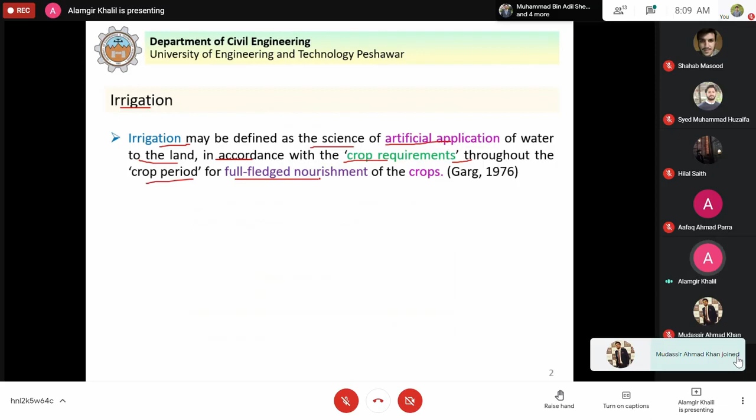Now, what is irrigation? Irrigation may be defined as the science of artificial application of water to the land in accordance with the crop requirements throughout the crop period for full-fledged nourishment of the crops. So what is irrigation? It is the science of artificial application of water to the land.

As I said before, the natural way to supply water to the crops is rainfall. If we have rainfall that can supply the correct amount of water to the crops at the required times, then there should not be any need of artificial application of water. But rainfall is a random variable, meaning sometimes we have more rainfall, sometimes less, and rainfall cannot ensure the required quantity of water to the crops, not just at one place, but at all the places where we grow crops. So since it is very difficult, we have to artificially supply the water to the crops.

Because agriculture provides food to the population, this is important for survival. That is why we have irrigation: the science of artificial application of water to the land in accordance with the crop requirements. How much water the crop requires, according to that we have to supply the water throughout the crop period, from the time of sowing to the time of harvesting. So throughout the crop period, the amount of water required by the crop for full-fledged nourishment is known as irrigation. We artificially supply water to the crops during the crop period according to the crop requirements. This is irrigation.

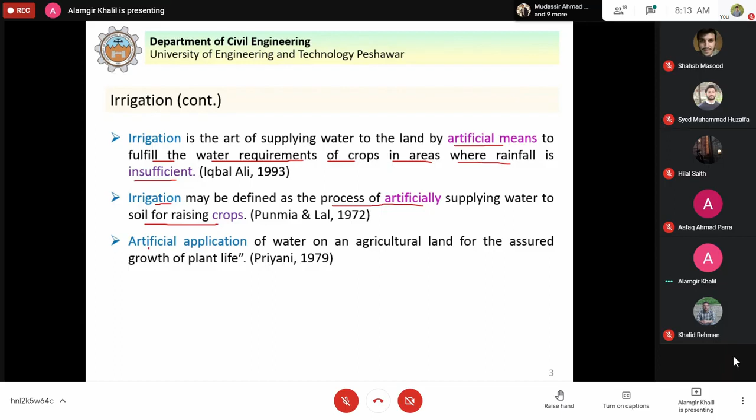Similarly, irrigation may be defined as the process of artificially supplying water to soil for raising crops, or artificial application of water on an agricultural land for the assured growth of plant life. So from all these definitions, we can conclude that it is the artificial application of water to the crops for their full-fledged nourishment. This is known as irrigation.

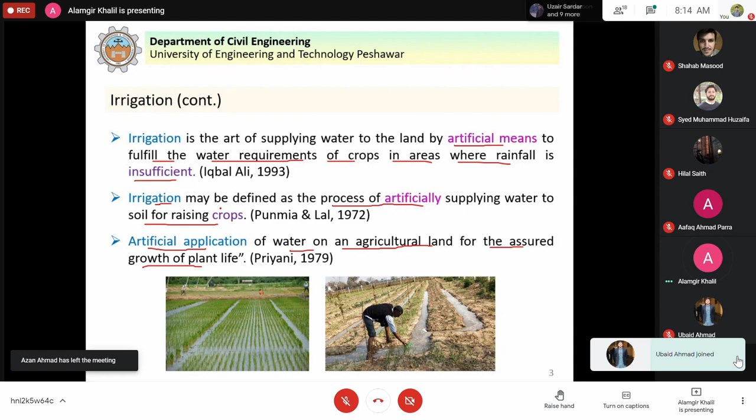Now, what is irrigation engineering? The science of planning and designing a water supply system to the plants and crops for their normal growth during the period of no rainfall, with the help of dam, weir, barrage, reservoir and canal system with headworks, cross drainage works, and miscellaneous works of canal like canal falls, is called irrigation engineering.

So what is irrigation engineering? It is the science of planning and designing a water supply system. Now we learn that irrigation is the artificial application of water to the crops. So how do we provide this water to the crops? For this we have to plan and design a water supply system.

That will include construction of a dam, weir or barrage, or we directly divert the water from a river through a canal system, or the canals can be provided from the dams with headworks where we can control the flow, and the network of canals if they cross natural streams or drains.

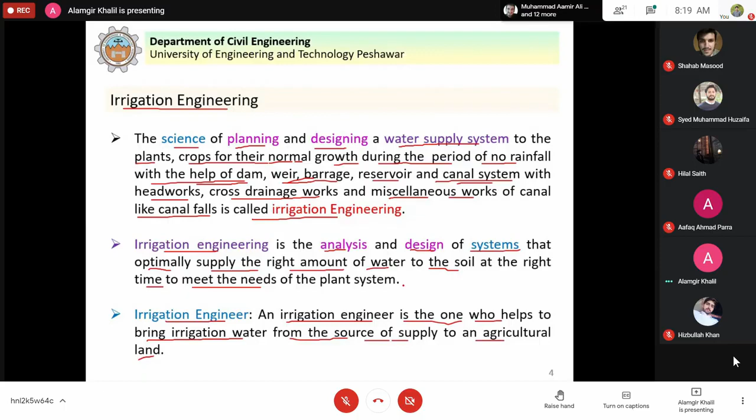Now, is irrigation a new science or art that we supply water to the agricultural land? Irrigation system is as old as human civilization. In fact, civilization would probably not be possible without some form of irrigation. The earliest form of irrigation probably involved people carrying buckets of water from wells or rivers to pour on their crops.

Irrigation means that we artificially supply water to the crops, but the same crops provide food, which is important for the survival of human beings. So we are growing crops since the beginning of human civilization, because food is important for survival, like water, so it means that we have to supply water to the crops.

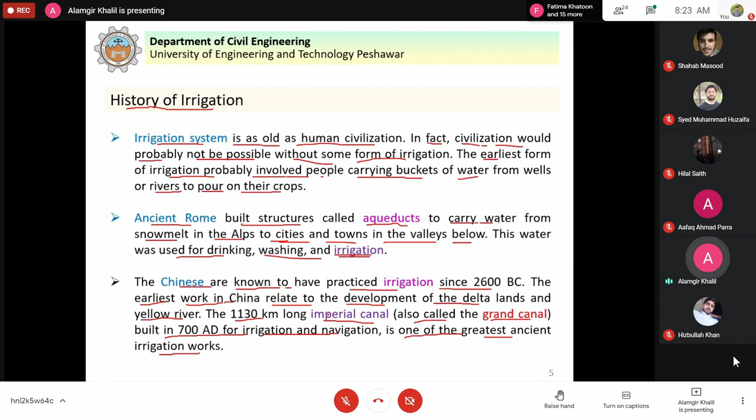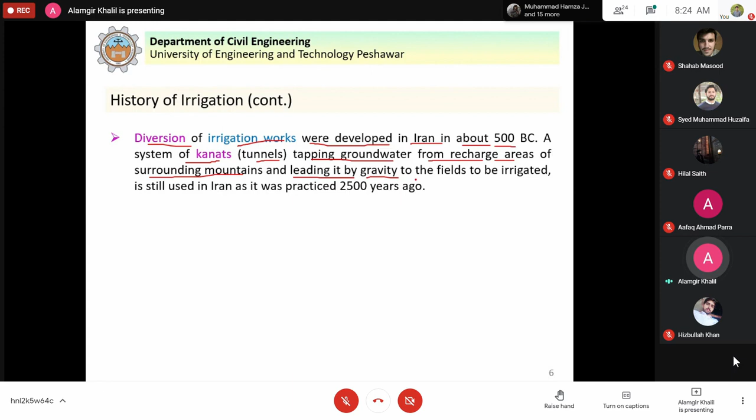Diversion irrigation works were developed in Iran around 500 BC. A system of kanats, tunnels, tapping groundwater from recharge areas of surrounding mountains and leading it by gravity to the fields to be irrigated, is still used in Iran as it was practiced 2500 years ago. You can see here that these kanats, which are very famous even today, show how at that time people, through these tunnels, took the water to the fields to be irrigated.

Diversion of streams by canals for irrigation was practiced in Japan before 600 BC. You can see here that in Japan, canals diverted water from streams for irrigation. Irrigation by diversion works and direct flooding by rivers is known to have been extensively practiced in Thailand, Philippines, and Indonesia. The ruins of Mohenjo-daro and Harappa, the Indus Valley civilizations, have also shown proof of use of water supply and irrigation.

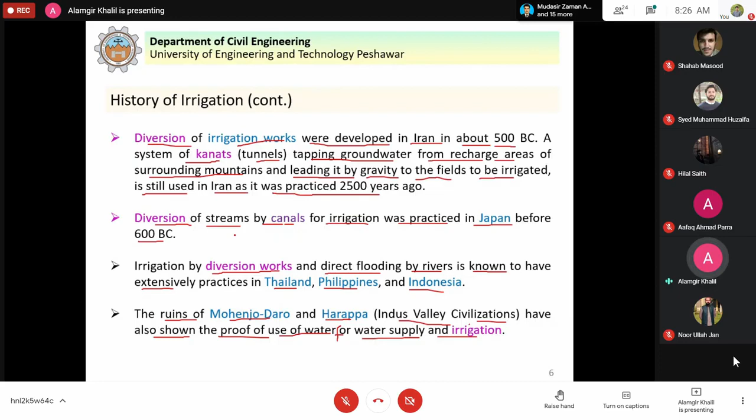Now, irrigation engineering consists of 4 phases. Number 1 is storage or diversion. The first step in irrigation engineering is that we have to store the water by construction of a dam, or we have to divert the water from a river by construction of a barrage. So this is the first phase.

The second phase includes conveyance of irrigation water. How will we convey this irrigation water?

We have to construct canals for this purpose that will carry the water from the dam or from the river directly.

The third phase includes distribution and application of irrigation water. By distribution, we mean that we have to distribute this water between the different agricultural lands, between the different farmers that own that land. So how we distribute that water, and then how the water is applied to the crops, for this we have different methods of irrigation. Once the water reaches the farm, how it is applied to the crops.

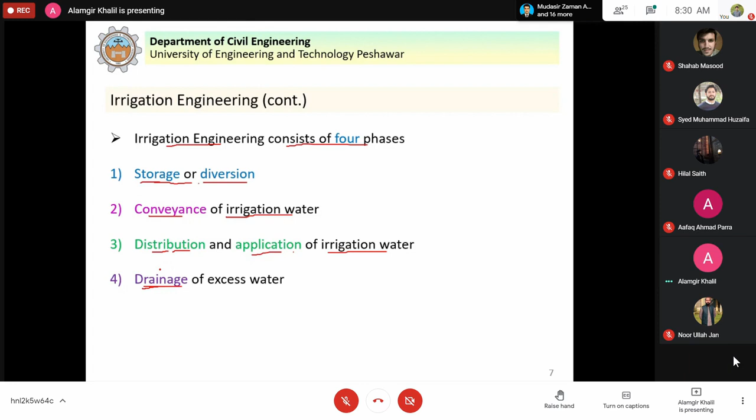Next, we discuss the necessity of irrigation. The first important factor is less rainfall, because the rainfall over an area is not sufficient to grow the crops. That necessitates artificial supply of water to the crops. As I said before, if we have sufficient rainfall, then there is no need of artificial application of water. But as we saw in the first lecture, the rainfall is variable from place to place. Just like you saw that in Sindh and Balochistan, those areas receive less rainfall during a year that is not sufficient to grow the crops. That's why those areas are classified as semi-arid to arid land.

So the reason why we have irrigation is because of less rainfall. The second factor is non-uniformity of rainfall. If we have uniform rainfall over an area, in that case it can supply water to the crops. But since rainfall is highly variable, this is also one factor that necessitates artificial supply of water, because the rainfall from area to area is not uniform. So, non-uniformity of rainfall.

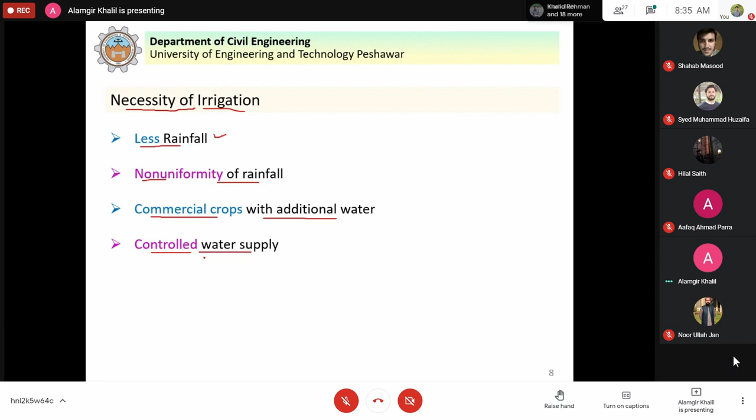In irrigation, we can have controlled water supply. You can see that over rainfall we have no control. Rainfall is a natural process and it occurs depending on the natural conditions of that area. But when we artificially supply water to the crops, we have control over the water supply. For example, from the dam, you can stop the supply of water in the canals. Or if we have diversion of water from a river, we can stop the water, or we can control the quantity of water that is flowing. So this is the advantage that we have controlled water supply.

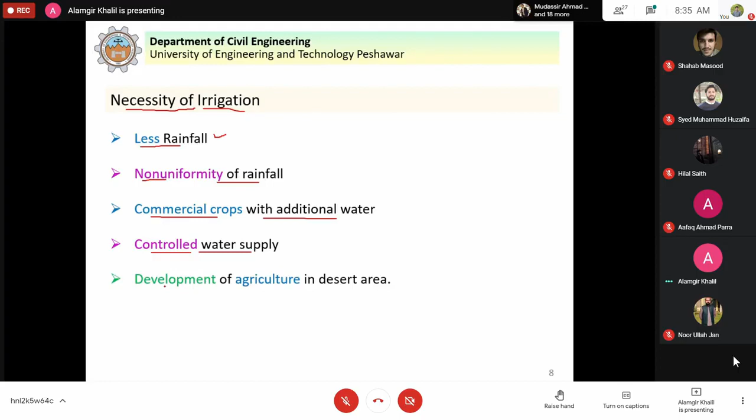Development of agriculture in desert areas: you can see that in deserts we can bring the land under cultivation if we can construct canals that can supply the water from dams or from rivers to that area. So it can be brought under agriculture, we can grow crops. This is possible through irrigation. So these are the different factors that necessitate irrigation and irrigation engineering.

Now, advantages of irrigation: increase in food production. Because of irrigation, more area is brought under cultivation. We are able to grow more food to feed the population, and also agriculture is the backbone of our economy. It provides jobs for millions of people. So the first factor is increase in food production. Because of irrigation, we artificially supply water to the crops at the required times and required quantity, so we are able to increase food production.

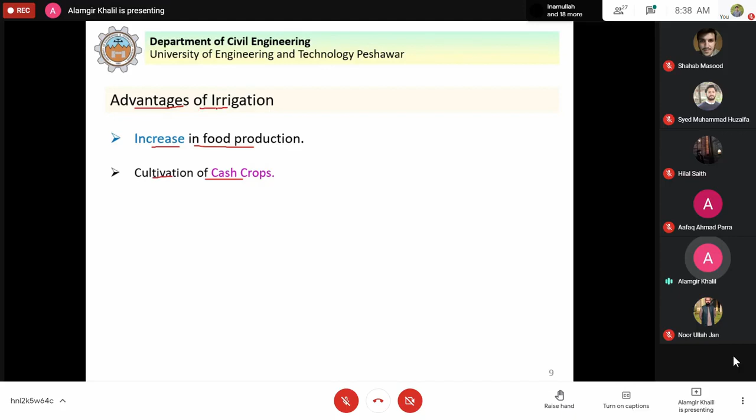Cultivation of cash crops. Cash crops mean crops that can provide cash, money, just like cotton as I said. Cash crop can also be tobacco, although it is not encouraged anymore. These are examples of cash crops that can lend the farmer cash. So this is an advantage of irrigation, cultivation of cash crops.

Generation of hydroelectric power. Because we construct the dam to store the water that can be supplied for irrigation, but we are also able to generate electricity. Similarly, hydroelectric power can be generated. You see the Ghazi Barotha hydropower project. It is just a canal which carries water from Ghazi to Barotha, but there a head is available, and we have installed 5 Francis turbines generating electricity. So because of irrigation, we get the opportunity to generate hydroelectric power.

Domestic and industrial water supply. The network of canals which supply water to the crops, the same canals can be used to supply water for domestic and industrial purposes also, because the crops do not require water 24 hours every day. So we supply water to the crops when they require it, and during the remaining period the same canals can supply water for domestic and industrial purposes to the adjoining areas.

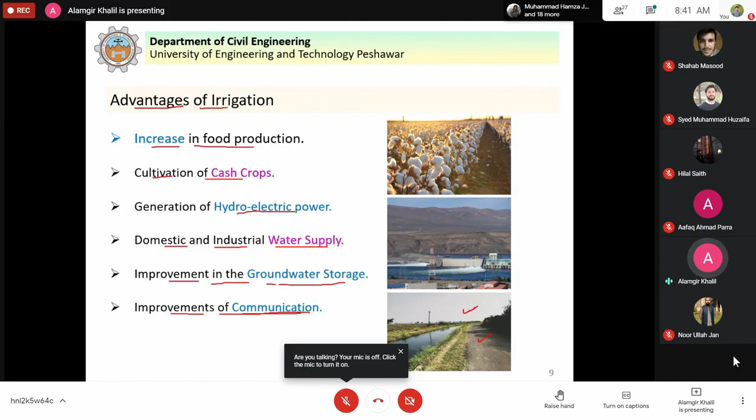Improvements of communication. You can see here that when we construct canals, along the sides of the canal we also build roads. So because of irrigation, we have improvements of communication. So these are the advantages of irrigation.

Now some disadvantages. Raising of the water table, that is water logging. Because of irrigation, we supply water artificially, so on the other side you see that the dams we construct, seepage takes place, and the water table in the adjoining areas can raise, and if the water rises to the root zone, then plants will not be able to grow. So the productivity of the land is adversely affected.

Because of irrigation, you see that if the area is flooded and the water is not drained, this can also happen. That is why drainage is important and is a prerequisite of irrigation engineering, that we have to drain the excess water from that land. So if in an area the water table intersects the ground surface, the water will be there in the root zone all the time. That is not beneficial, we cannot grow crops. That is known as water logging. Because of irrigation, this is the disadvantage, that the water table can rise to the root zone or the surface of the ground, and the land can become not productive for agriculture. So this is a disadvantage of irrigation.

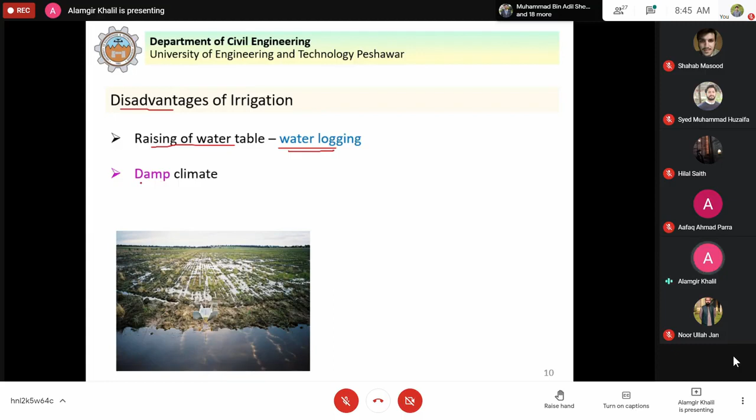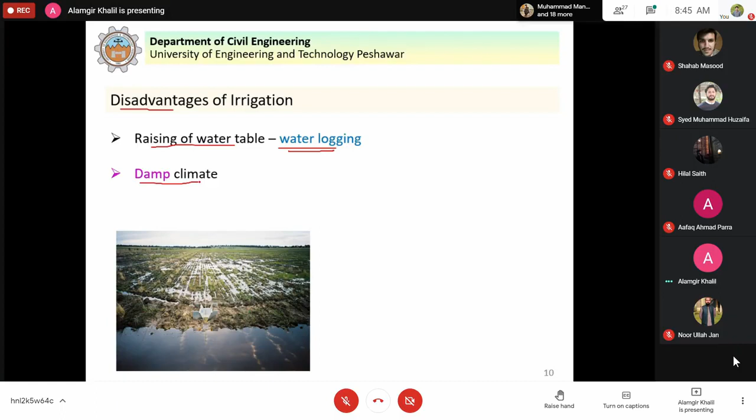The second thing is we have a damp climate, which is undesirable, because it can become a breeding place for mosquitoes, and it will result in spreading of diseases in that area. So the disadvantages are that we artificially supply water to the crops. We should ensure that we supply the quantity of water that is needed by the crops during the crop period. Excess than that, then there will be negative impacts.

Now, other problems that are associated: competition for surface water rights. It means that the water which is used for irrigation may not be used for other purposes such as domestic and industrial water supply. So there could be competition. It means we cannot supply water for agriculture unlimited, there are other competitions. We have to supply water that is available in an area for drinking purposes, for domestic water supply, for industrial purposes, and for agriculture purposes. So it means that the water which is supplied to the crops will not then be available for domestic or industrial water supply. So it means competition for surface water rights.

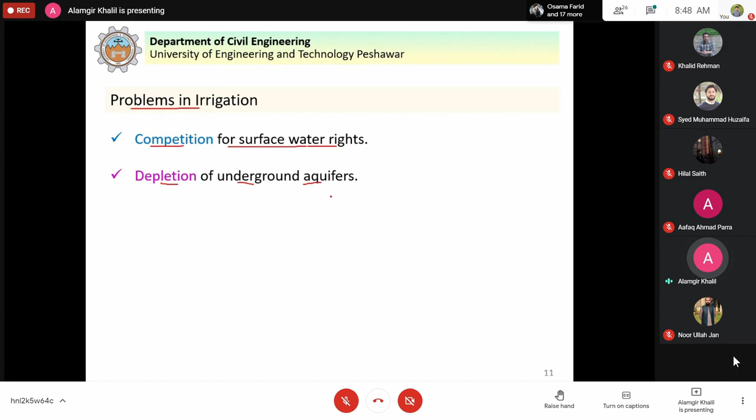So it means that when we pump the groundwater, it should be such that it does not cause negative impact on the groundwater storages. The groundwater that is recharged by rainfall or other sources that we studied in the first lecture, that is seepage from the rivers or from the canal network, and then we are extracting that groundwater. So if the extraction is more than the recharge of the groundwater storages, then definitely it will result in depletion of these underground storages.

And this is an important source of water for domestic, industrial, and agriculture purposes. You can see here in Peshawar we are using the groundwater for different purposes. So if the groundwater storages finish, then you can imagine. So the problem with irrigation is that extensively we are supplying the water to agriculture, that causes depletion of underground aquifers.

Build-up of toxic salts on soil surface in areas of high evaporation. In an area when we supply the water, the water dissolves the different salts that are present on the surface of the earth. So in areas where there is high evaporation rate, the water quickly evaporates and leaves behind these salts.

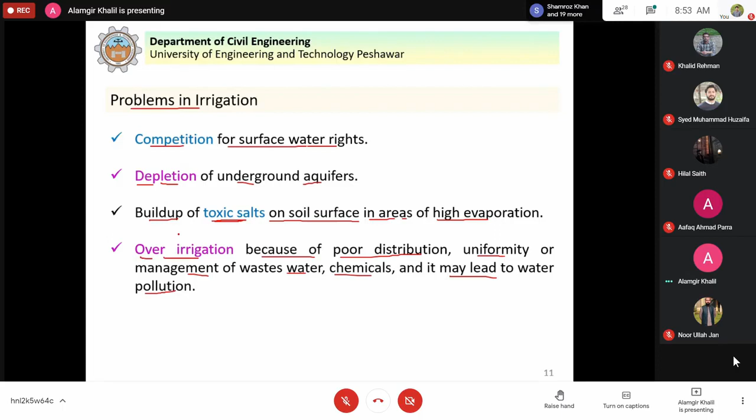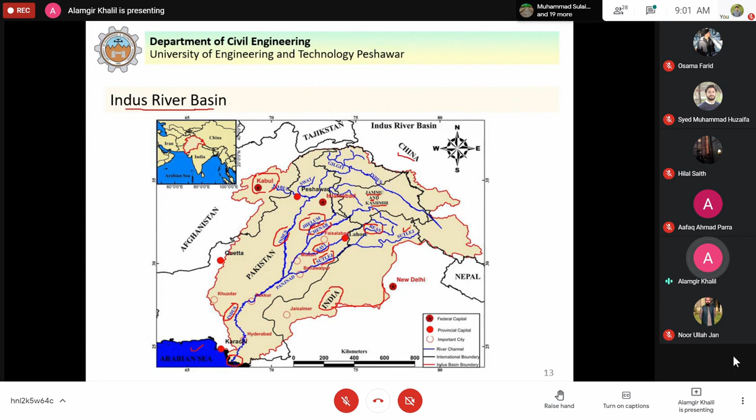Indus, Jhelum and Chenab. If I go back here, you see this Indus, so this is originated here. This is Jammu and Kashmir. It's not that these are not originating in India. Similarly, you can see here the Jhelum and the Chenab here. You see the Chenab here. So these are also coming from India.

But under the Indus Water Treaty, Pakistan has full control over the use of water of the 3 western rivers, whereas India has control over the use of water of the 3 eastern rivers, that include the Ravi River, Beas and Sutlej. So on the Indian side, you see this red line shows the partition. They have constructed hydraulic structures.

You can see here on the Pakistan side, we have this Tarbela Dam, Kalabagh Barrage, Mangla Dam on the Jhelum River, Marala Barrage, Kadirabad Barrage on Chenab, then Rasool Barrage on Jhelum River. You can see here Chashma Barrage, Taunsa Barrage on the Indus River, then Trimmu Barrage here, Sidnai Barrage, Baloki Barrage here on River Ravi. Then we have Sulemanki Barrage here, this one, Islam Barrage, on the Sutlej, then Panjnad Barrage and Gaddu Barrage here. So these are the different hydraulic structures that exist in the Indus Basin Irrigation System.

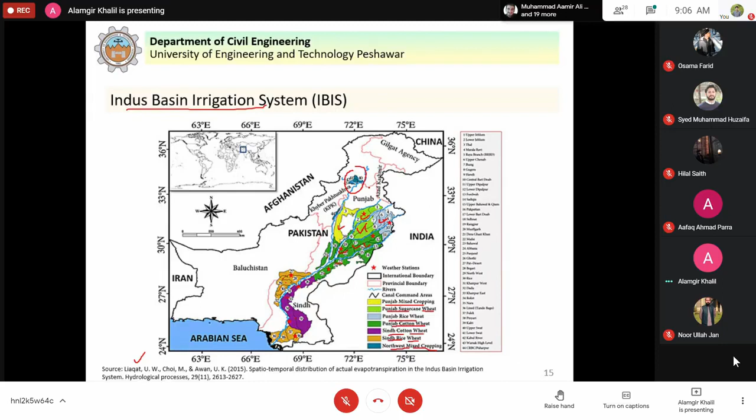Now, land use in Pakistan. So the total geographical area is 196 million acres. In Pakistan, area suitable for agriculture is 77.1 million acres. The cultivated area, that is irrigated plus the rain-fed Barani, is 54.5 million acres. Now area under irrigation by all sources is 44.5 million acres.

Additional area that can be brought under irrigated agriculture is 22.6 million acres. In this figure, the area under irrigation is shown by this shaded blue or green color. This white-blue combination is area that can potentially be brought under irrigation, showing the potential for more lands to be developed for agriculture. This shaded area here represents deserts. So there exists great potential for areas that can be cultivated, resulting in food production. Pakistan can become self-sufficient in food and also export and earn foreign exchange.

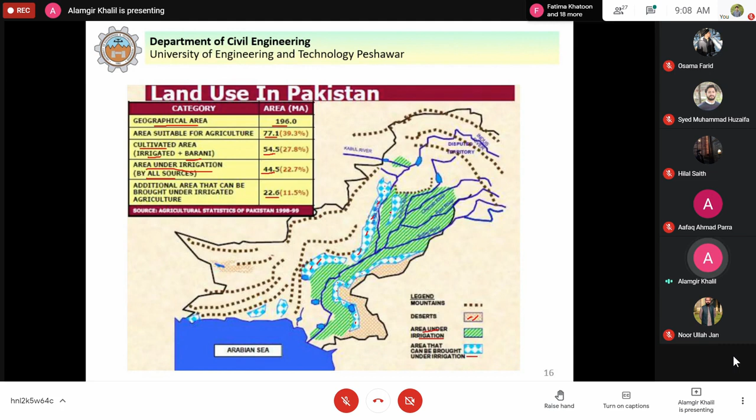Now this Indus Basin irrigation system is Pakistan's largest contiguous gravity flow irrigation system that serves the Indus River and its tributaries, namely the Jhelum, Chenab, Ravi, and Sutlej rivers. It is the largest continuous gravity flow irrigation system serving the Indus River and its tributaries, and the largest continuous surface water irrigation system in the world, starting from the north to the south of the country.

It consists of 3 major storage reservoirs, 19 barrages, 2 headworks, 2 siphons across major rivers, and 12 link canals. As I said in the first lecture, a link canal links 2 rivers together. When you want to divert water from one river to another, that is done by these canals, known as link canals.

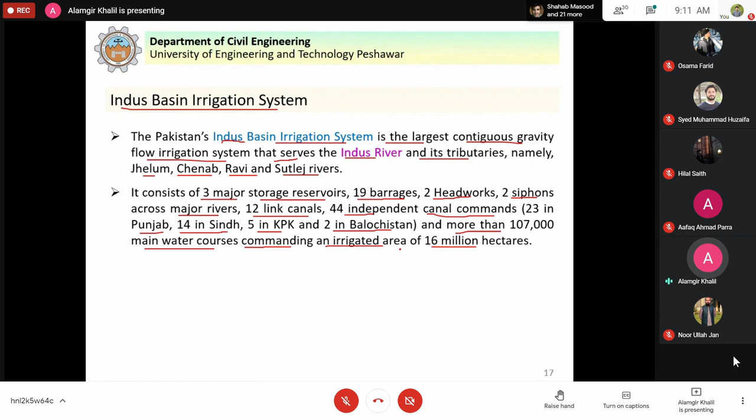The aggregate length of canals is about 56,073 kilometers. This is the total aggregate length - if you add up the length of canals provided in the Indus Basin irrigation system, that is 56,073 kilometers. In addition, the water courses, farm channels, and field ditches are estimated to cover a length of about 1.6 million kilometers. So we have the main canals and then the water courses, farm channels, field ditches, narrow channels that supply water, covering a length of about 1.6 million kilometers.

The irrigation system of Pakistan further utilizes over 41.6 million acre feet of groundwater pumped through more than 700,000 public and private tube wells. So in addition to the surface water we utilize from the Indus River and its tributaries, in Pakistan we are also utilizing more than 41.6 million acre feet of groundwater pumped through more than 700,000 public and private tube wells, for agriculture purposes. This is in the context of the irrigation system, remember.

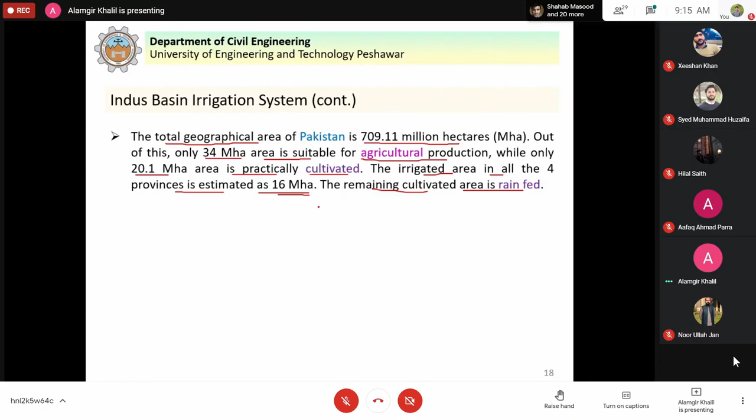The Indus Basin river system is the prime source of water for Pakistan's agriculture, which provides an income source to about 75% of the country's population and contributes about 25% to the GDP, gross domestic product of the country. That 25% of GDP is contributed by this Indus Basin river system.

It engages about 45% of the country's labor force and provides a sound base for the economy in terms of export and foreign exchange earnings. All these figures provided here and in the previous slide are from this source: Applied Irrigation Engineering, a book published by the University of Agriculture, Faisalabad, in 2017.

Now, water budget of the Indus Basin irrigation system, this is taken from internet. You see that mean annual river flows, that is between 140 to 150 million acre feet. Mean annual canal diversions, 103 million acre feet. Canal supplies at water courses, 77 million acre feet.

And canal supplies at the farm gate that is available to the farmer, 54 million acre feet. Because we already discussed the seepage losses, the evaporation losses, and the groundwater contribution around 50 million acre feet. So the irrigation water at the farm gate, that is 104 million acre feet.

So you can see that agriculture GDP, that is $50 billion, $500 million per million acre feet.

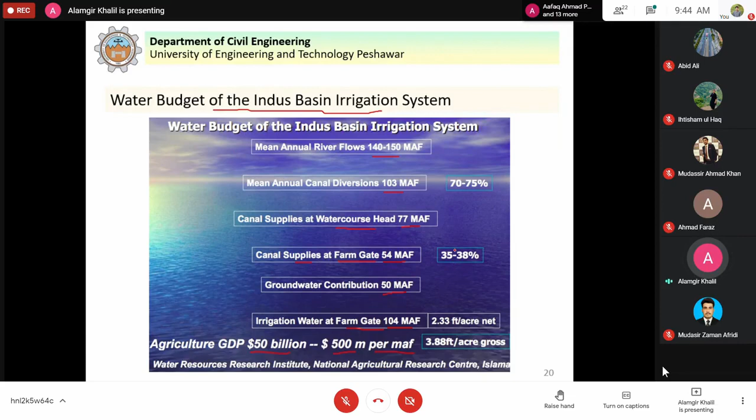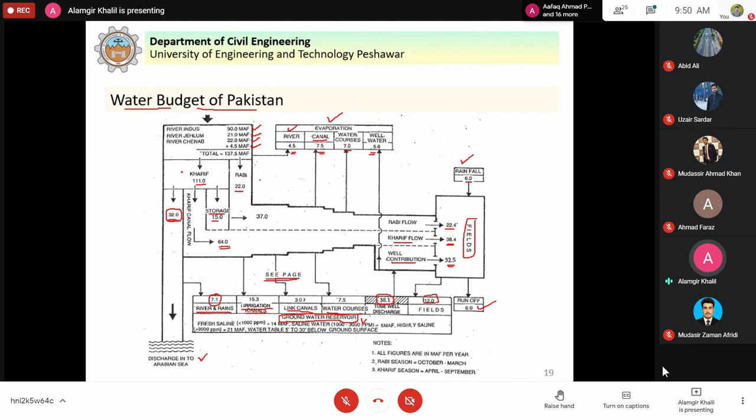Inadequate storage capacity. You can see, for example, 32 million acre feet of water is wasted to the Arabian Sea. If we have more storages available, we can store this water and then use it effectively to meet the water demands. So we have inadequate storage capacity.

Outdated and wasteful irrigation practices. This means that when we supply water to the crops, we are using outdated methods because that results in waste of water. In Pakistan we are using very conventional methods of irrigation - we just flood the irrigated area with water. Not all of that water is used by the crops at one time, so consequently the water is wasted. If we can use some latest methods, which we will discuss in today's lecture, it can result in saving more water and we can use that water more productively.

Unregulated groundwater pumping. We talk about the depletion of groundwater. The reason is that in Pakistan it is unregulated. The groundwater is extracted to meet the demands, and in Punjab it is used for irrigation purposes. So it should be regulated because this is an important source of water, and if the groundwater storages are depleted, then this source of water will no longer be available for use.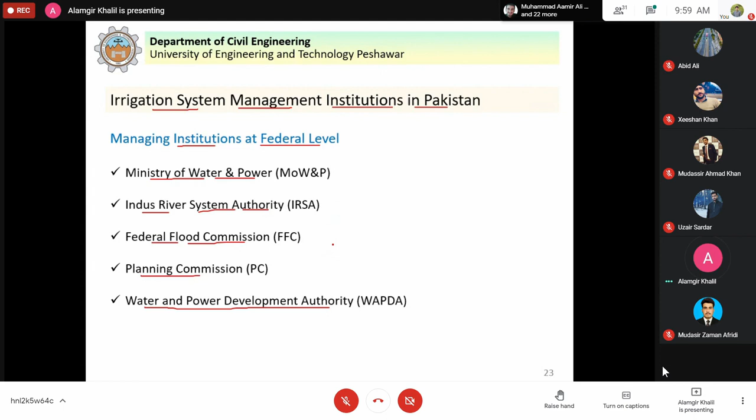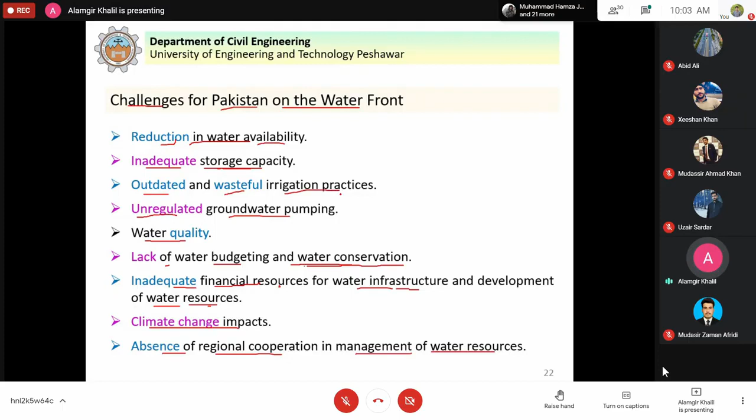Now we discuss types of irrigation. Irrigation can be divided into surface irrigation, and it can be subsurface irrigation. In the surface irrigation, the water is supplied over the surface of the ground, and then it is taken up by the roots of the crops for growth. In the subsurface irrigation, below the surface of the earth, through a network of pipes, the water is supplied to the root zone and it is taken up by the plants for growth. So we have surface irrigation and subsurface irrigation.

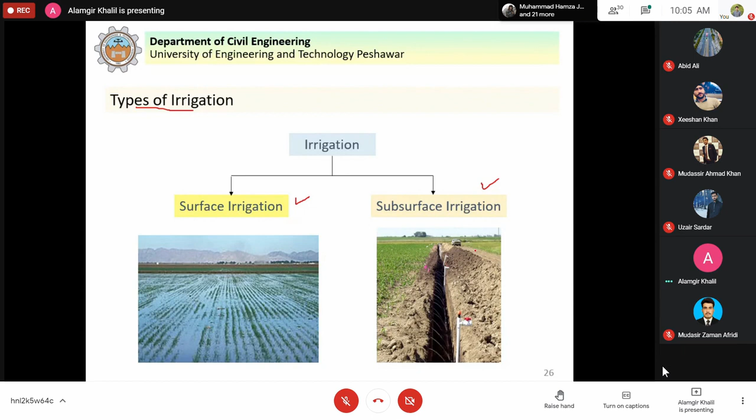Now surface irrigation can be flow irrigation, due to gravity, or lift irrigation, where water is lifted by mechanical means such as wells and tube wells. So that is lift irrigation.

Now flow irrigation can be perennial irrigation or flood irrigation, also known as inundation. What is the difference between the two? In perennial irrigation, like we say perennial river, it means throughout the year water flows in that river. When we say perennial irrigation, it means throughout the crop period there will be continuous and sufficient quantity of water available for the crops. There will be no shortage - continuous and adequate water is available throughout the crop period.

Perennial irrigation - we also have flood irrigation. Just like in a river, water is available only during floods. When floods come, water is available; when there are no floods, the rivers are dry. Similarly, in flood irrigation, the area is flooded and then soil moisture in the ground supplies water to the root zone, used by the crops. In addition, rainwater supplements this water for the growth of crops. So this is inundation or flood irrigation.

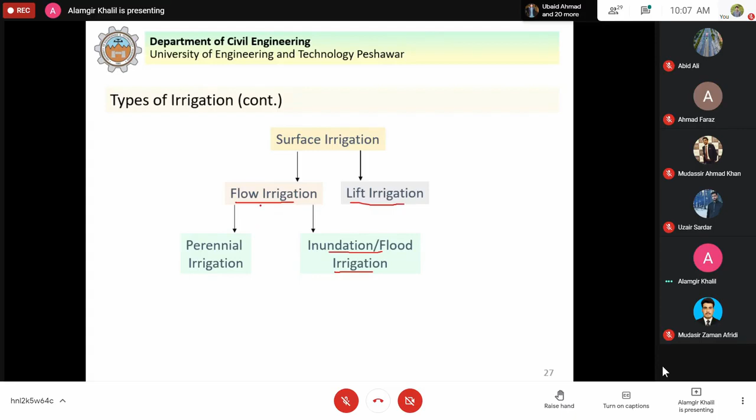In flow irrigation, water flows due to gravity. In lift irrigation, we have to lift the water - for example, through wells and tube wells, via pumping. Then the water is supplied through canals to the agriculture fields. This flow irrigation can be direct irrigation, that is river canal irrigation, where we simply divert water from the river through canals. Or it can be storage irrigation, where we construct a reservoir or storage scheme and supply water from there. Or it can be a combination of storage and diversion.

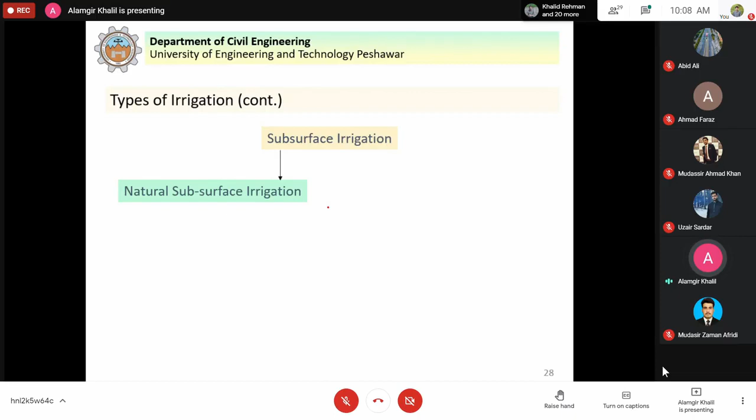Now, subsurface irrigation can be natural subsurface irrigation - leakage water from channels goes underground and may irrigate crops sown on lower lands by capillarity. Although it cannot be on a large scale, sometimes the water leakage from channels carrying water goes underground and may irrigate crops sown on lower lands by capillarity. This would be called natural subsurface irrigation.

We also have artificial subsurface irrigation, when a system of open jointed drains is artificially laid below the soil to supply water to the crops by capillarity. In this case, a network of pipes is provided that directly supplies water to the root zone of the crops. That is artificial subsurface irrigation. An example is Karez in Balochistan, which has been practiced for a long time.

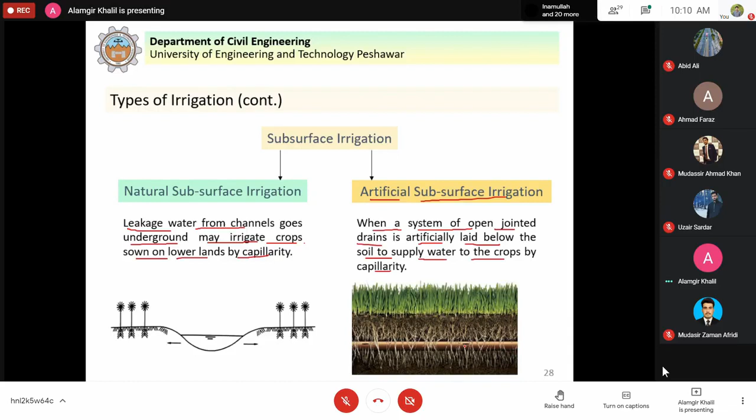You can see here that in subsurface irrigation, we have a network of pipes running underground that supply water to the root zone. Of course, it is expensive to provide such an arrangement in an area. Another challenge is how to maintain such a system - if there is any blockage, how do we know? So maintenance could be an issue.

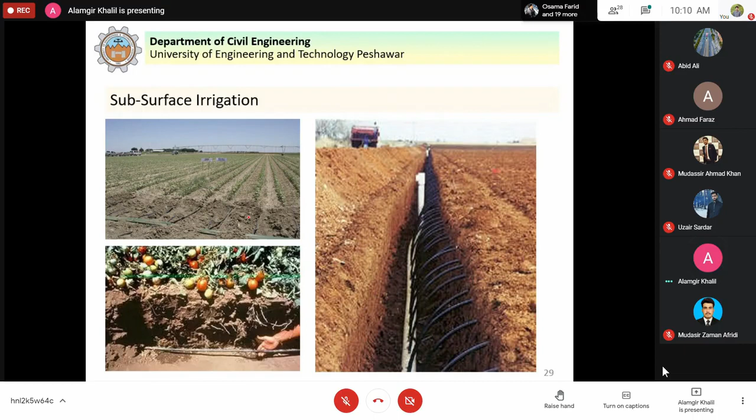Next, we discuss methods of irrigation water distribution in the farms - when water reaches the farms, how it is distributed through different methods. Irrigation water may be applied to the crops by various methods: free flooding, border flooding, check flooding - these are different methods. Also basin flooding, furrow irrigation method, sprinkler irrigation method, and drip irrigation method. These are the different methods by which water is supplied to the crops.

Let us briefly discuss each of these. The choice of irrigation method - how do we select it? The following criteria should be considered. Water supply available - some methods are very water intensive and supply more water, while others supply less. This is one factor that determines the choice: how much water is available. If water availability is scarce, we cannot use flooding methods; we use other methods that save water and only provide the required quantity to the crops.

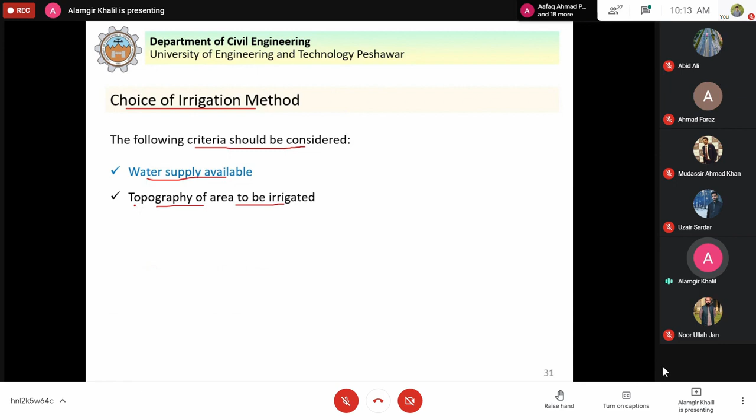Topography of the area to be irrigated - based on topography, we determine which method is suitable to effectively supply water to the crops. Also the climate of the area, what crops we have to grow, and how to supply water effectively. The soils of that area are also an important factor. Crops to be grown - what type of crops are we growing? Do these crops require less water or more water? This will also impact the selection of the particular method.

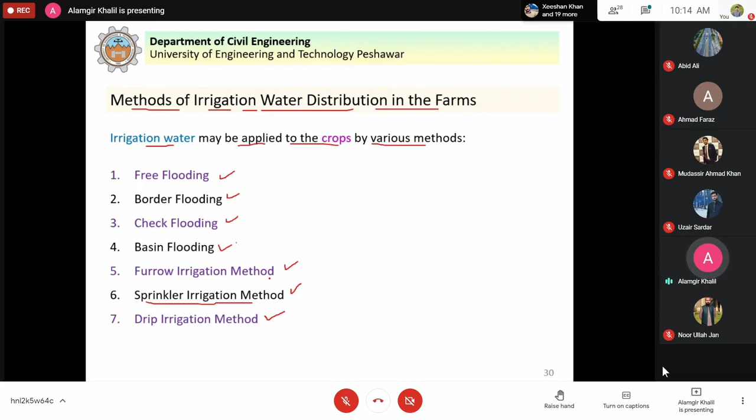Economics: is the method we use to supply water to crops cost effective? For example, if we are using the latest methods, what will be the cost of installation and the output we get in the form of crops? So the economics affects the selection of method, along with local traditions and skills. For example, with sprinkler irrigation, do the farmers have the skills to use this technique of water application to the crops? These are the different factors that affect the choice of irrigation method.

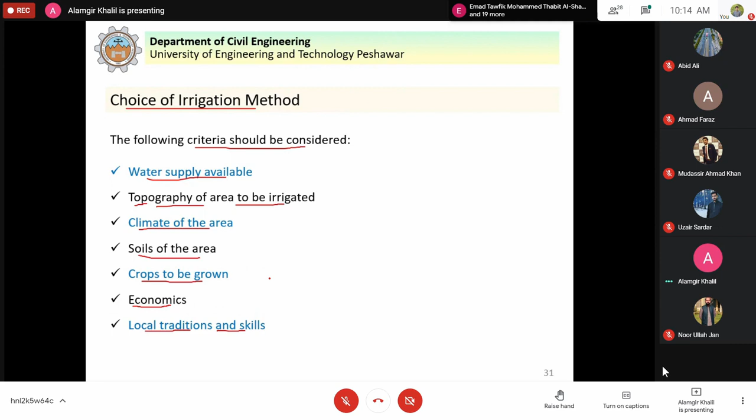Now we discuss free flooding. We have the main supply ditch, a narrow channel that supplies water to the farmers, then subsidiary ditches, and the area is flooded with this water. Here we are not controlling the water, that's why it is called free flooding. These are examples of free flooding.

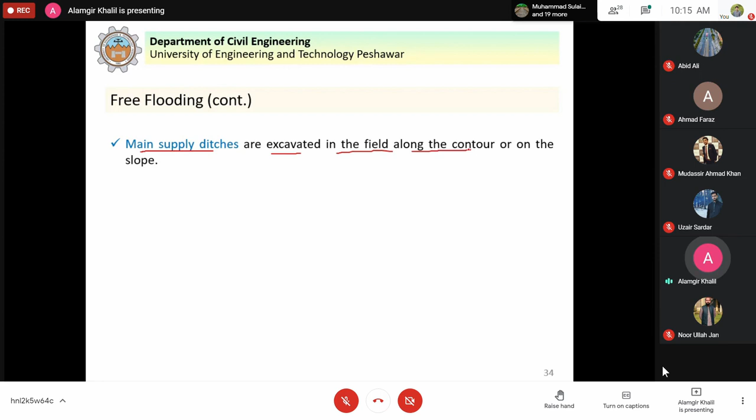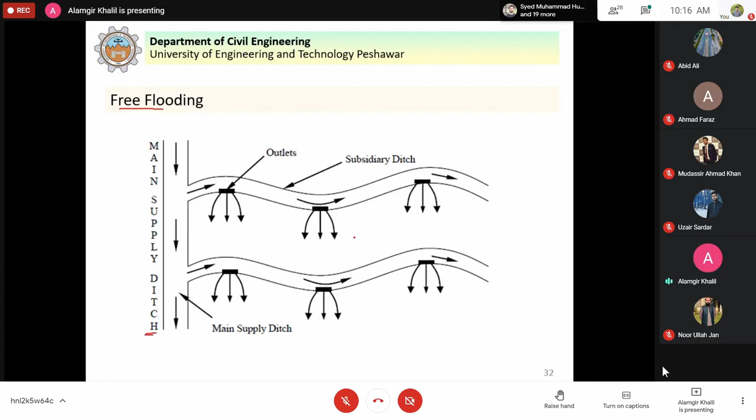In this method, we have main supply ditches excavated in the field along the contour or on the slope. Water flows from these ditches to subsidiary ditches and then to the field, just as shown here. Subsidiary ditches are spaced 20 to 50 meters apart depending on slope, soil texture, and crops. Movement of water is not restricted, that's why this method is sometimes called wild flooding.

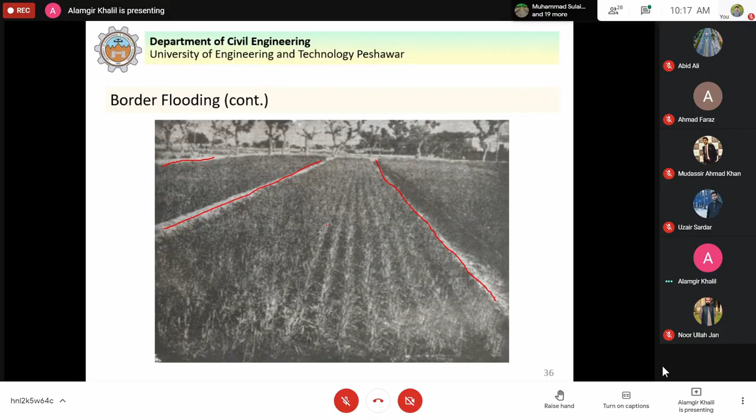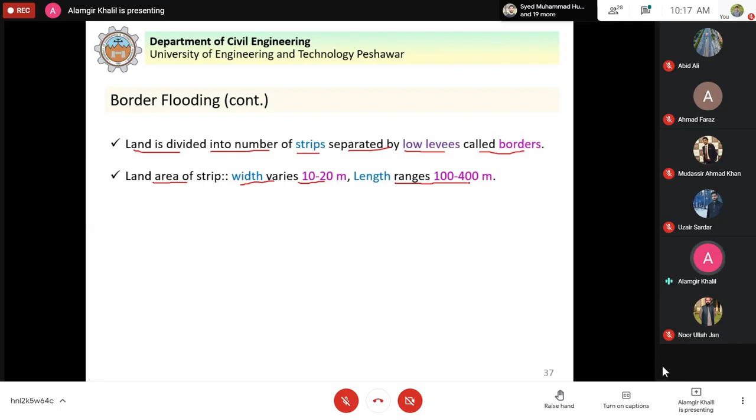Land is divided into a number of strips separated by low levees called borders. The width of the strip varies from 10 to 20 meters, and the length ranges from 100 to 400 meters. Ridges between the borders should be sufficiently high to prevent overtopping during irrigation. The land should be perpendicular to the flow to prevent concentration of water on either side, so water is distributed uniformly over the land without concentration on either side.

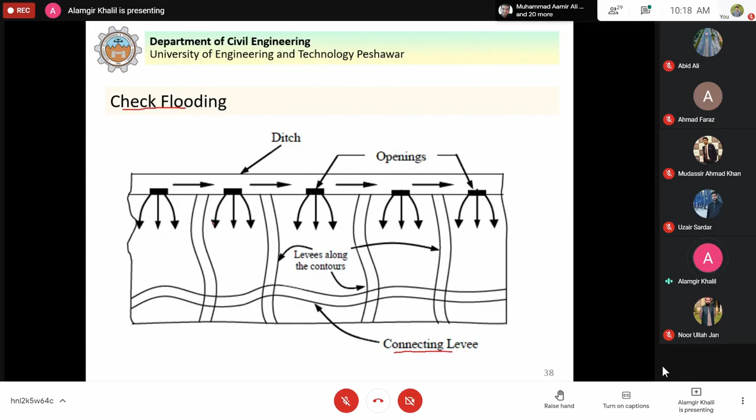Next we have check flooding. Here we further divide the area with connecting levees into small plots, as you can see. The area is divided into small plots like this, and so on. This is check flooding.

It is similar to the flooding method except the flow is controlled by levees. Levees are constructed along contours at intervals of 5 to 10 meters, and these levees are connected with cross levees. The confined plot area varies from 0.2 to 0.8 hectares. This method is suitable for both permeable and less permeable soil because we control the flow.

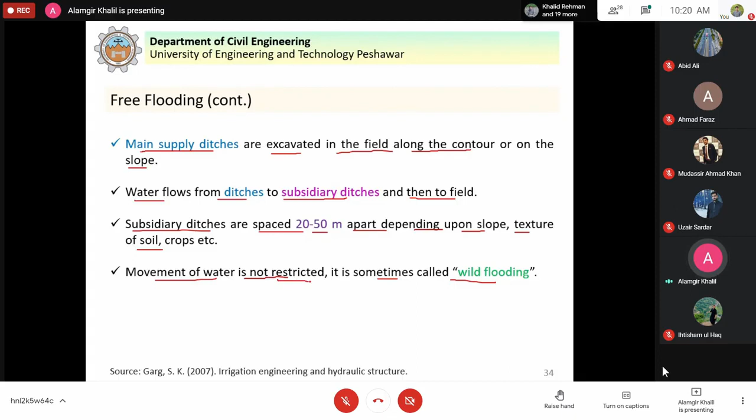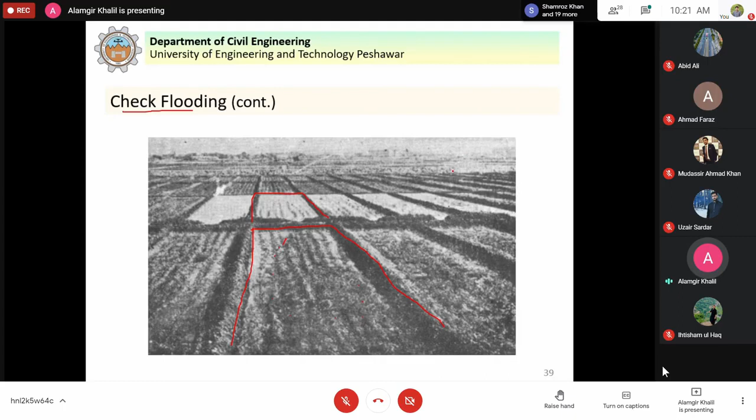In check flooding and border flooding, the water is controlled as compared to free flooding, where movement of water is not restricted, which is why it's called wild flooding. But in these methods, the flow of water is controlled, since we divide the land into small strips in check flooding. If the water seeps quickly, it can still supply water to the root zone; but if permeability is high in the whole land, water could seep away before reaching other areas. That's why this method suits both permeable and less permeable soil.

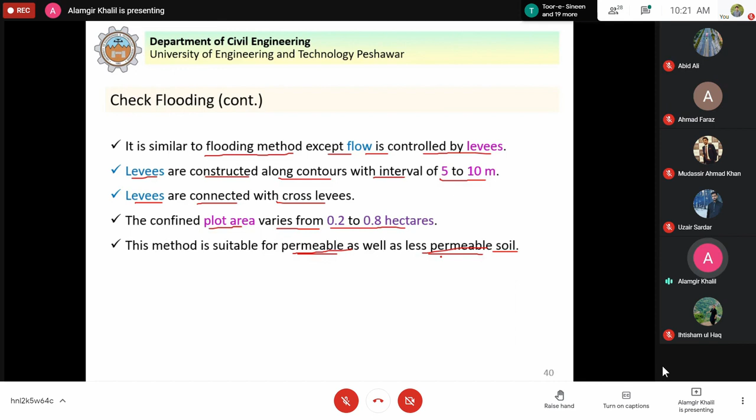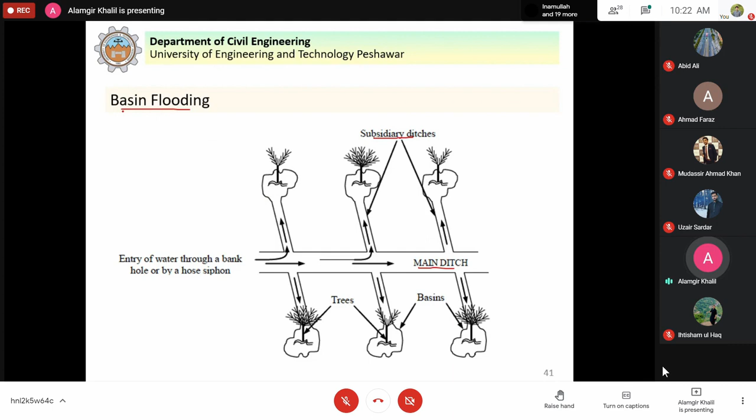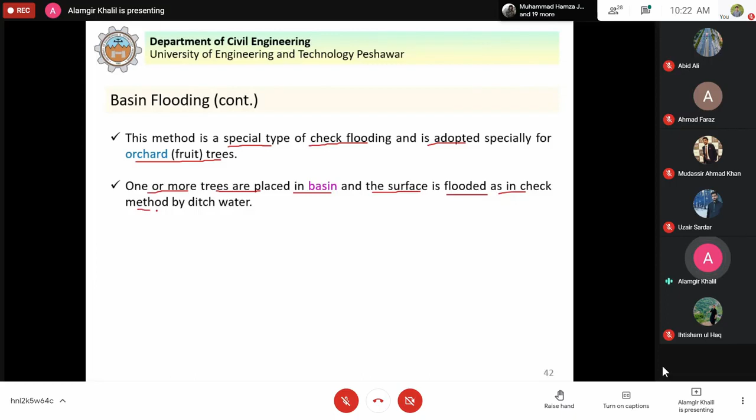This method is a special type of check flooding adopted especially for orchard trees. One or more trees are placed in a basin, and the surface is flooded as in the check method by ditch water. Water flows in the main ditches and through subsidiary ditches to supply water to the basin. As you can see with these orchard trees, this method is suitable for them.

We have another method, that is the furrow irrigation method. In furrow irrigation, the whole land is not flooded as we saw in the previous techniques.

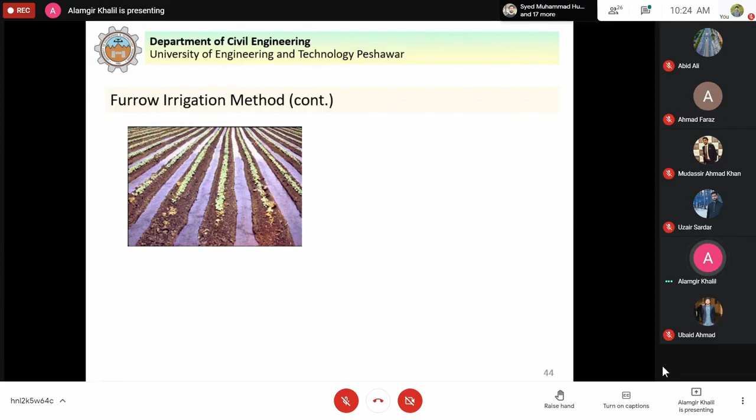This method is suitable for crops that can be grown in rows. You can see here, these are known as furrows, and water is supplied only in these furrows or field ditches. So it means we are saving water in this method because the whole land is not flooded, as compared to flooding methods.

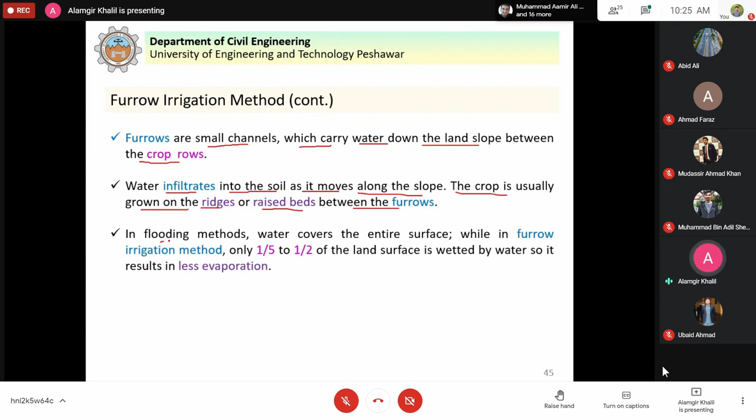Furrows are small channels which carry water down the land slope between the crop rows. Water infiltrates into the soil as it moves along the slope. The crop is usually grown on the ridges or raised beds between the furrows. In flooding methods, water covers the entire surface, while in furrow irrigation only 1/5 to half of the land surface is wetted, so it results in less evaporation. This is a more efficient method compared to flooding techniques.

This method of irrigation is used for row crops like potato, maize, sugarcane, cotton, and tobacco, with furrows developed between the crop rows during planting and cultivating. So this method is suitable for row crops which are grown in rows.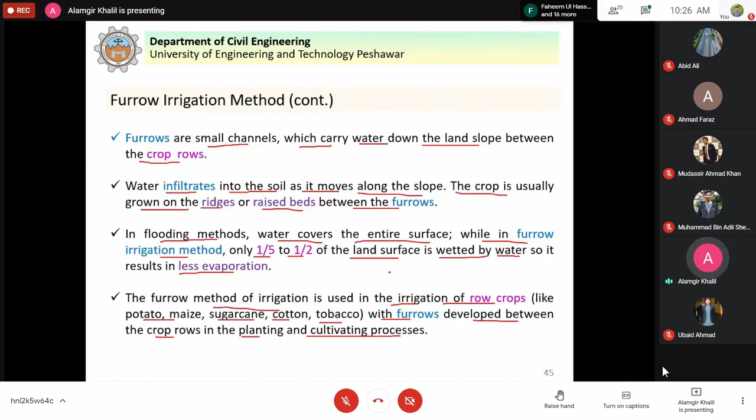Next we have the sprinkler irrigation method. You can see here.

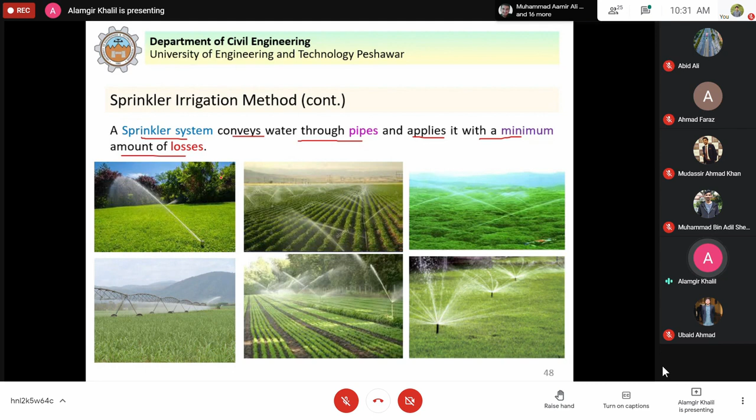Water is applied to the soil in the form of spray through a network of pipes and pumps. It is a kind of artificial rain, and it is a costly method. It can be used for all types of soils and widely different topographies and slopes, because since we just spray the water, it can be independent of the topography. It can advantageously be used for many crops because it fulfills the normal requirement of uniform distribution of water, uniformly supplying water to all parts of the area.

In the flooding technique, water can infiltrate quickly if the soil is more permeable, and as water moves over an area the quantity can significantly reduce. So this method has the advantage of fulfilling the normal requirement of uniform distribution of water.

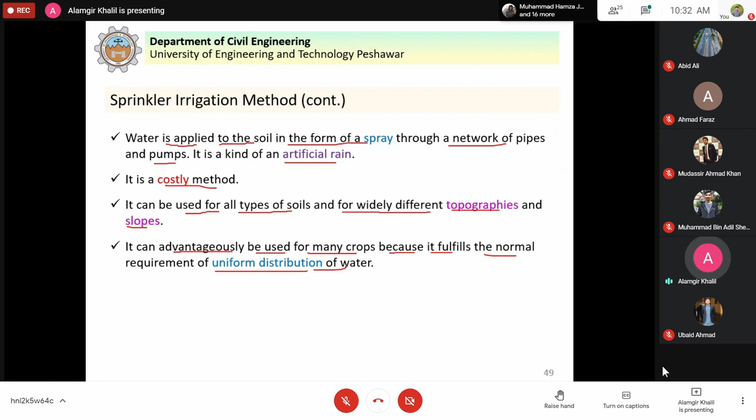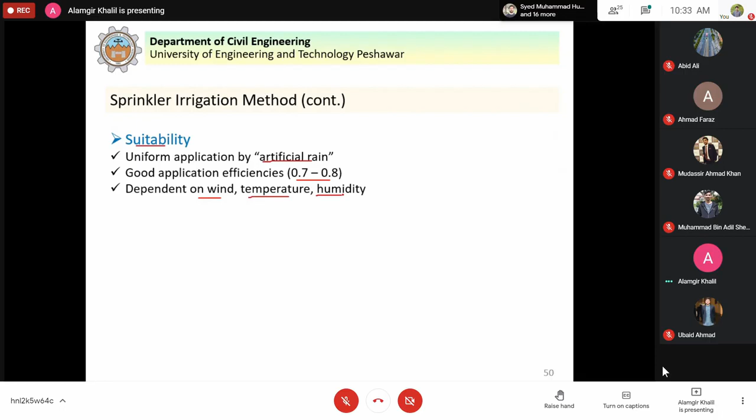Suitability of this method: uniform application by artificial rain, good application efficiency of 70 to 80%, dependent on wind, temperature and humidity, fairly terrain independent but design must take terrain into account. It can have low labor content because if the system runs efficiently it has low labor requirements. However, there is more initial cost to install, high maintenance cost due to pumping, and it can be complex to run.

In the context of Pakistan, we have not adopted this system on a large scale. The reason is the initial cost of the system, the operation and maintenance, and the need to train farmers to efficiently run this system.

Types of sprinklers can be permanent, where the whole system is permanently fixed in the area and sprays the water. It can be semi-permanent, where the main pipes are fixed and the laterals that spray can be removed and brought back and fixed when applying water. Or it can be portable, meaning the whole system can be moved from place to place and used for irrigation water supply.

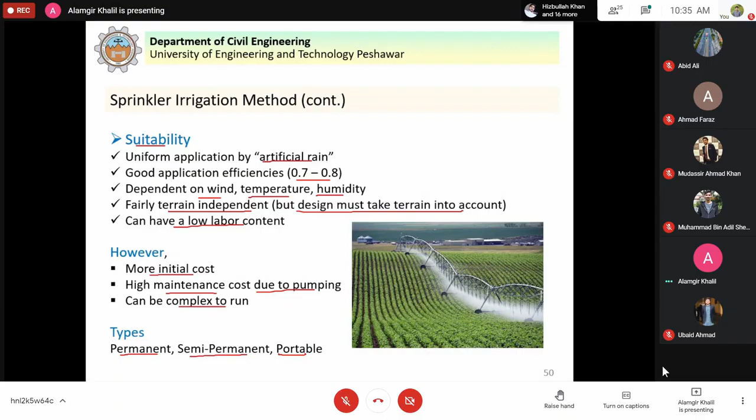How does Saudi Arabia make use of central pivot irrigation? This is what we mean. You can see these wheels, the whole system can be moved, like this. This is central pivot irrigation, clear? We have this whole system, it can move around this center here, and you can see it can sprinkle the water and move all around. So this is central pivot irrigation.

Of course, this is the sprinkler system. You can see a huge circle of land on which the crops are grown, and we simply move this sprinkler all around the central pivot to supply water to the crops. This is extensively used in the US. In Saudi Arabia, this picture taken from space shows how Saudi Arabia is utilizing this central pivot irrigation system for growing crops. This is made possible through these systems.

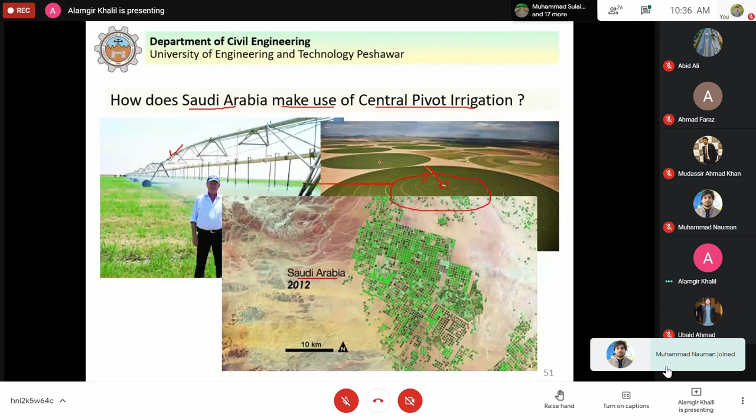Next method is drip irrigation. In this method, we pump the water from the source, then the water passes through screens to remove any undesirable solids and waste, and then through a network of small pipes, the water is supplied directly underneath the plants. This drip irrigation method can be surface or subsurface. So you see a network of small pipes that directly supplies water underneath the crops or plants.

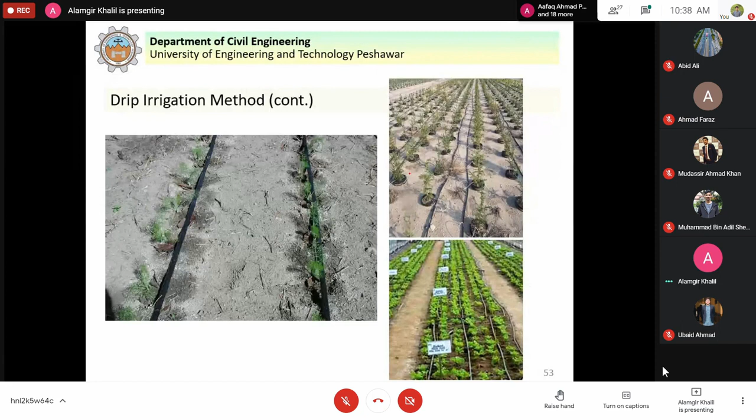Consequently, the efficiency of this method is the largest. We have a network of small pipes that directly supply water to the plants and trees, so the whole area is not flooded. Even in the sprinkler system, water is sprinkled in the form of artificial rain, but here only the water is supplied underneath the plants. So the efficiency is largest, since we are just supplying water to the crops. This is the drip irrigation method, also called trickle irrigation.

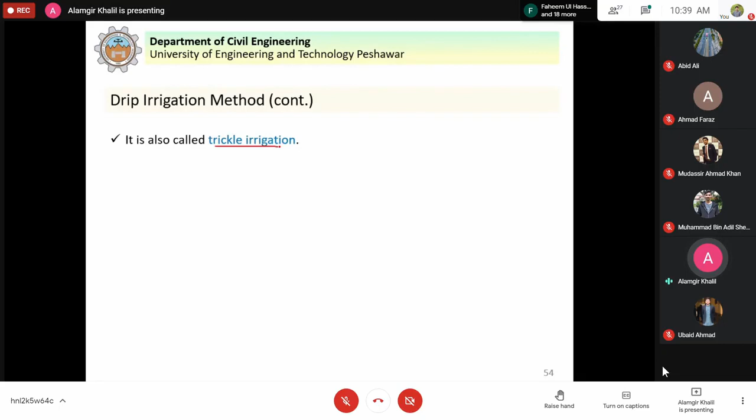It consists of an extensive network of pipes of small diameter that deliver water directly to the soil near the plant. The drip nozzles, also called emitters, will directly supply water to the plant. These emitters are fixed on laterals at regular intervals of about 0.5 to 1 meter, discharging water at very small rates on the order of 2 to 10 liters per hour.

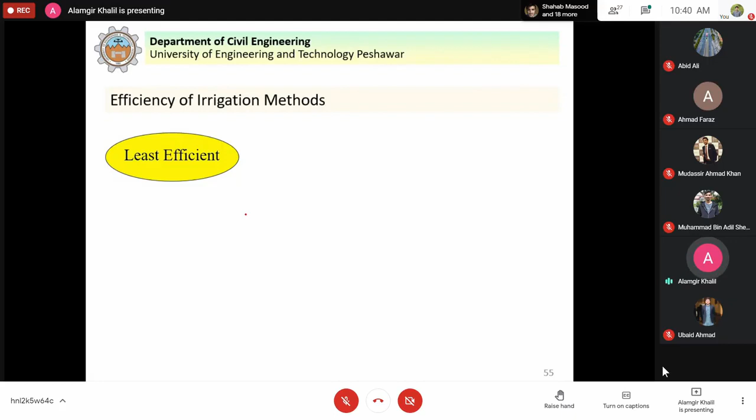We discussed the different methods of water application on farms, from least efficient to most efficient. Flood irrigation: we flood the area, supplying more water than is required by the plants, so its efficiency is less. Then furrow irrigation, where we supply water in furrows and not the whole area is covered, so this is more efficient than flood irrigation.

Then sprinkler irrigation, where we spray water on the surface of the land but can save water by providing only the required quantity. Finally, drip irrigation, where we directly supply water underneath the plants, resulting in saving more water. So the efficiency of drip irrigation is the largest.

But in Pakistan, we are using conventional methods. The reasons given are that we have more water available to us, and methods like sprinkler and drip irrigation are costly to install and to operate and maintain. These are the reasons we do not use the latest technology of water application that could save water and let us grow more food. Pakistan can become food self-sufficient and earn money through exports. So we use conventional methods of irrigation, and this is why Pakistan has the largest continuous irrigation system in the world, but the crop yield is lowest in the world.

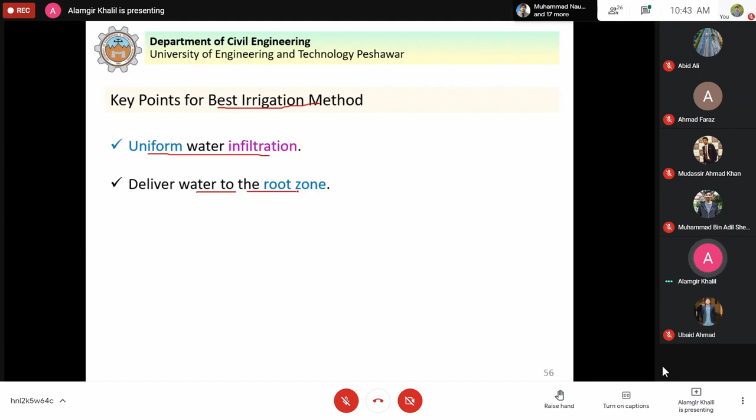Now, key points for the best irrigation method: uniform water infiltration, where water should infiltrate into the soil uniformly over the area. Deliver water to the root zone, because the plants use the water for growth, so all methods should be able to deliver water to the root zone effectively, with high efficiency, with lowest operative cost, with lowest cost per acre and per metric ton produced. These are the key points for the best irrigation method.